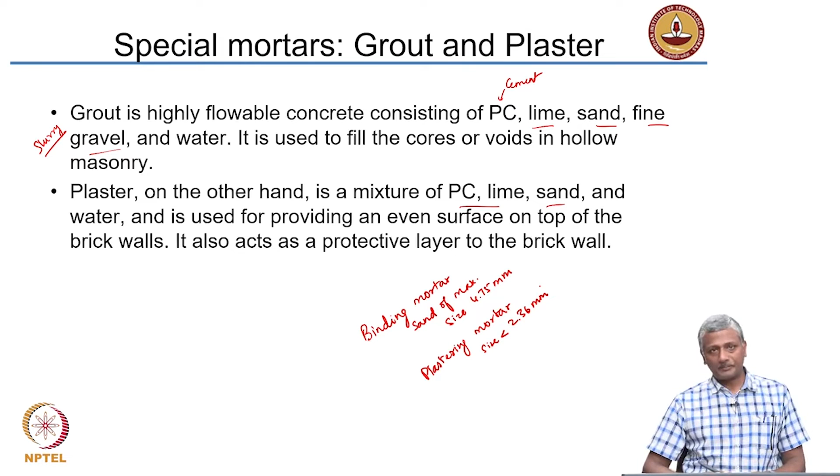Now, very often if you go to different parts of the country, you will see interesting practices being done with lime. With lime, oftentimes you will find the use of different types of additives. For example, if you go to North India, you will see that additives for lime could include something like urad dal. In the old practices and the heritage monuments, they used to grind this urad dal into a nice paste and mix it with lime. It basically improved the consistency of the mortar and made it easier to apply.

In South, you will often find that jaggery is being mixed in the mixture of lime and water. They mix jaggery with lime mortar and water, and jaggery imparts a nice water retentive quality to the structure. So, depending upon the application and depending upon the geographical location, there are practices that have thrived, that have stuck on from age old times, which are still being followed, especially with lime. So, depending upon the geography and location, you may get very different practices as far as lime mortar preparation is concerned.

There are even examples of people having used blood in lime mortars. It turned out that blood was a very good water retentive material, so that ensured that the lime mortars were consistent and behaved nicely. But of course, you do not want to use blood anymore. In the past, they also used animal hair. Animal hair works like fibers inside the material, right? The mortar is held together nicely by the fibers.

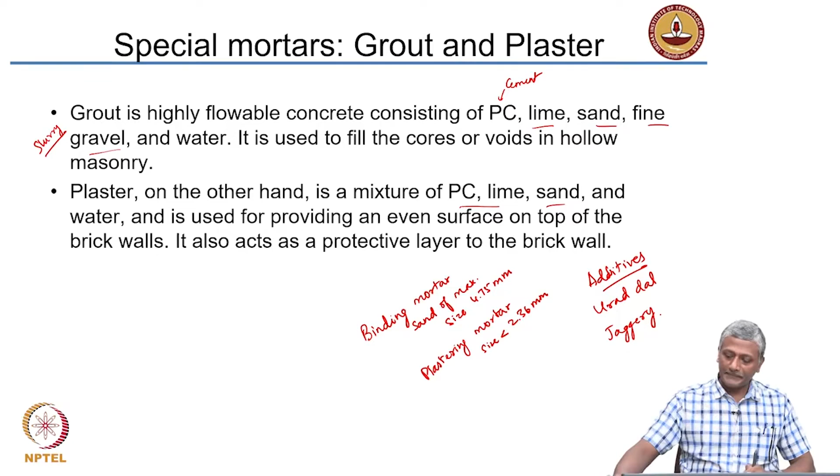Now, we have talked about masonry materials, but it is important for us to also understand how these materials are actually put together to make the masonry structure possible. And these masonry structures with stone, brick and mortar are engineered to resist loads primarily in the axial direction. A lot of them are not engineered to resist loads in the lateral direction. So, we will talk about that aspect separately towards the end of the chapter.

So, before we go into looking at specific aspects of masonry construction with bricks or with stone, let us try and understand some terms that are associated with masonry. One of the common terms that we use in masonry is that of a course. A course is nothing but a horizontal layer of masonry units which have a thickness equal to the thickness of each individual masonry unit. For example, if you are using a modular brick, the thickness will be 10 centimeters in a course.

If you are using a concrete block, the thickness in a course will be 20 centimeters. If you are using a traditional brick, which is 23 by 11 by 7, typically 23 by 11 is the top and bottom cross-sectional area, and the height is 7. So, if you are using a traditional brick, the height will be 7 centimeters.

Now, depending on how you are placing these bricks in your wall, they are called headers or stretchers. For example, if you are placing the bricks in the direction of the wall, that means the length of the brick is facing the direction of the wall, that is called a stretcher. So, it is stretching along the wall. A brick that is placed perpendicular to the direction of the wall, so if the wall is running like this, the brick is placed perpendicular to it, we call it a header. So, we have to use different arrangements to satisfy the certain requirements of the bonding.

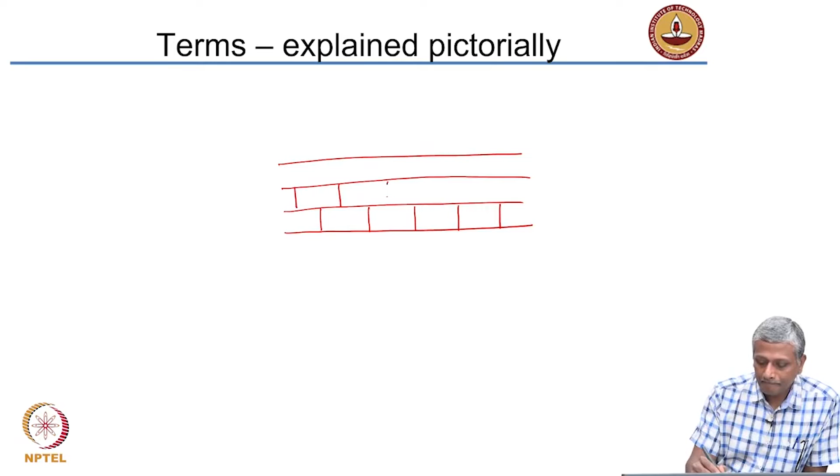Now, the joint is nothing but where the masonry blocks are coming together and where the mortar is available. So, we have bed joints, cross joints and vertical joints. Let me just demonstrate this in a simple drawing. I will just draw a typical brick wall. So, that is the bottom of my brick wall, and I have several layers of bricks, arranged like this for instance. So, let us say I have a running wall length which looks like this. I had several different definitions here. So, this is one course of bricks. One full layer of bricks is called a course.

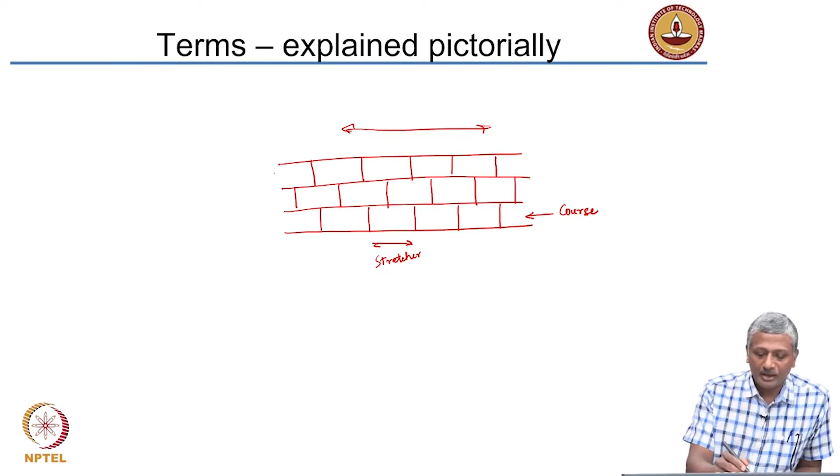We also saw header and stretcher. In this case, all the bricks are in their lengthwise direction, so they are all stretchers. The wall is running in this direction, and the length of the bricks is also in the same direction, that is called a stretcher. Now, if I come to the corner of the wall, where the wall ends, and I draw the plan of this wall, it looks like this. So, this is the end of the wall or quoin. If I am looking in plan, that is what it looks like.

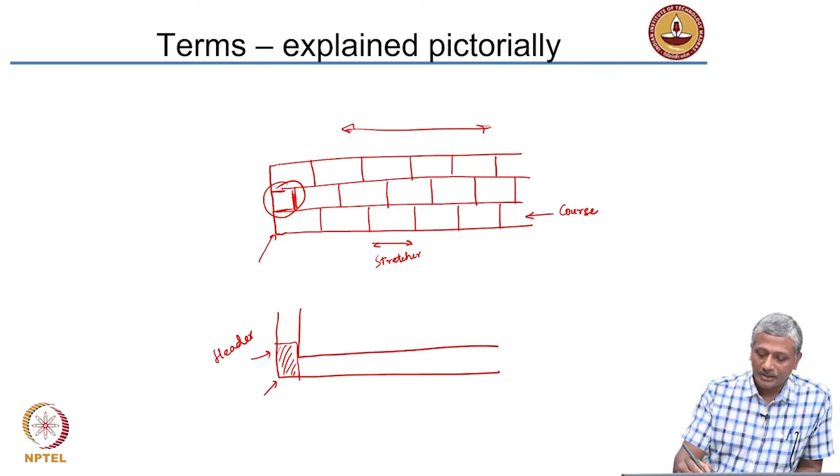So, if I draw the second course of bricks, this brick is actually in the other direction. So, that is called a header. When the brick is perpendicular to the main direction of the wall length, it is called a header. A bed is nothing but the lower surface of brick or stone in the course. So, in this course, that will be the bed, or in this course, this will be the bed.

Then we have the quoin. Again, as I said, the quoin is nothing but the exterior angle of the wall. So, that exterior angle is called the quoin. That's where we actually use the quoin closers or queen closers to close out the wall at the end so that it can run in the other direction. I'll come to that when we come to specific arrangements of the brick units.

Then we talked about the joints. The mortar that is in the bed is called the bed joint, obviously. The mortar that is in the vertical parts is called the vertical joint.

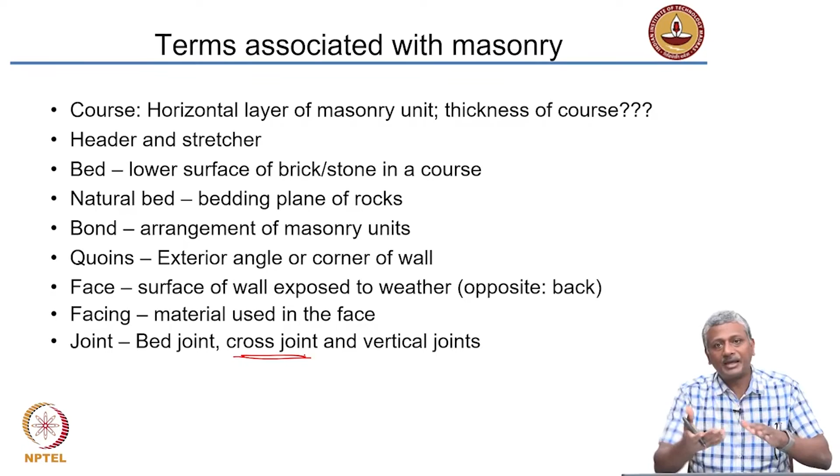And of course, if there are two layers of bricks like this in the wall, then apart from the vertical joints, you also have cross joints between the bricks. So, two bricks are stuck together like this; along the length they are stuck together, that's the vertical joint, and then under the bricks is the bed joint. So, those are the different terms which are explained pictorially here.

Now, there are other terms also we need to look at in masonry construction. Very often the terminology can be quite different as compared to regular concrete structures, so it is important that we understand this. In bricks, when we have a column, we typically call it a pier. A brick pier is a freestanding column. A brick pilaster is a pier that is attached to the wall and which projects beyond the wall. So, that is a pilaster and that is a pier.

Now, in a regular masonry construction, you have the main walls which are running like this, and you have the cross walls. Here the wall and piers are attached at different locations. There are also examples of the use of lintels or arches for door openings and window openings. There are several types of arches. We will talk about arches again separately later, but you can have different arrangements of window openings and door openings that are basically making your arches.

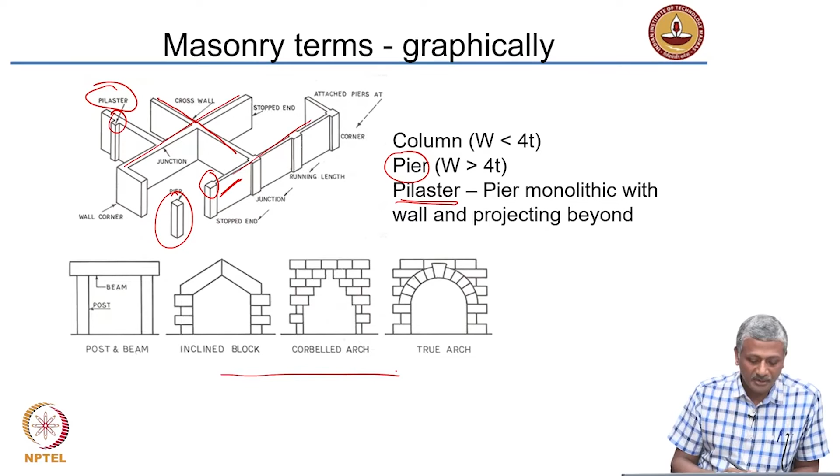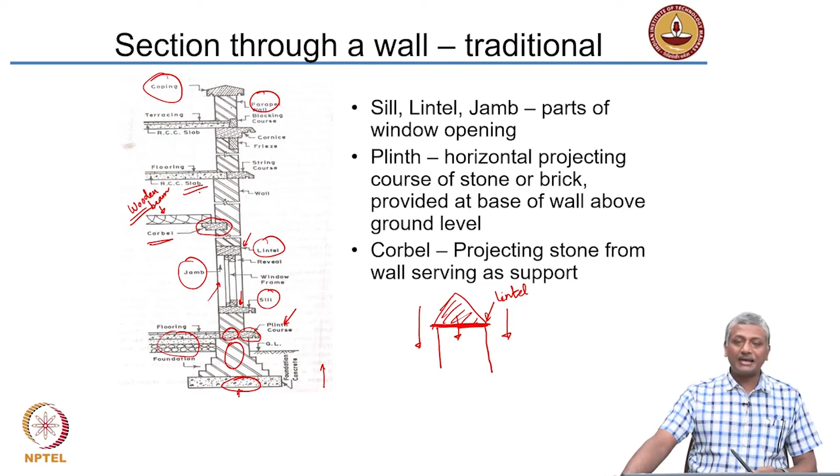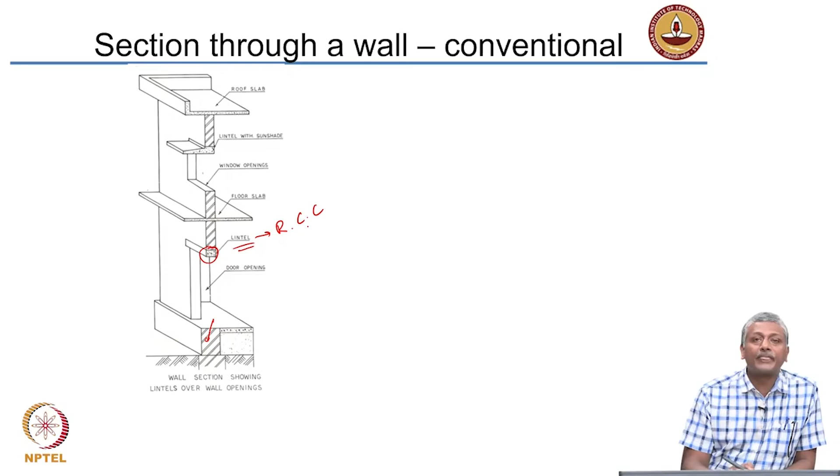In more recent construction, obviously you won't see such elaborate features. You'll probably see a very simple cross section of the wall. Nevertheless, it still combines different materials together. So in the foundation, obviously you have brick and concrete. Again, you have brick here. You have a door opening here. The top is a lintel, typically made with reinforced cement concrete, right? The floor slab is also made with reinforced cement concrete.

Okay. You have a lintel along with sunshade. You may have seen that these are projecting shades that come out of your window to ensure that the sun does not directly get in, right? So you are protecting your house against the direct entry of the sun. So it reduces the heat to a large extent. So that's called a lintel, and it has a sunshade attached to it, and that's also made typically with reinforced cement concrete.

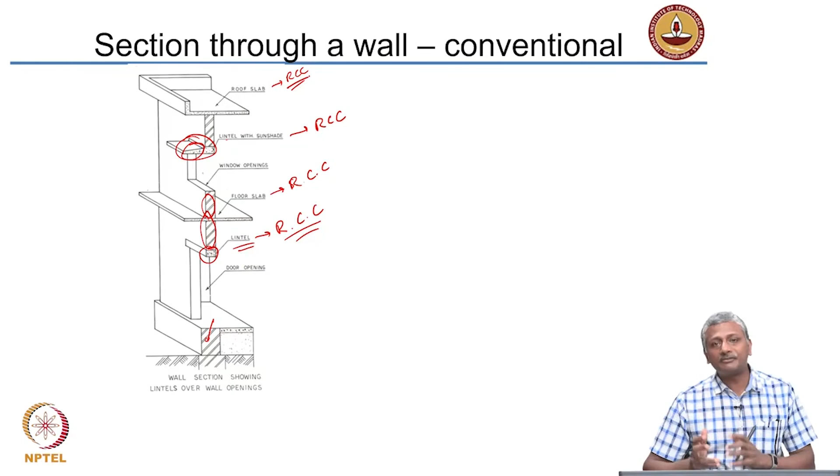So you have brick, you have the brick walls, okay, you have the reinforced cement concrete features like lintels and sunshades, and of course the roof slab is also made with reinforced cement concrete in most typical residential households. So this is a typical residential wall that you'll find. But in more modern buildings, we start utilizing the benefits of multiple materials together in a different way. And how do we do that? So in a modern building, we utilize the engineering concepts optimally. So what are these engineering concepts that we are trying to utilize?

So what does the reinforcement do? I told you that the walls are designed to take axial load. That means the loads that come in the plane of the wall. Now what if the loads are coming along this direction? The wall has to bend like this, right? And if it does not have reinforcement, it will simply collapse. So the wall lateral resistance is increased or enhanced by the presence of reinforcement so that it can respond to the lateral loads also nicely. So that's a nice structural wall, but on the outside it's got a brick veneer.

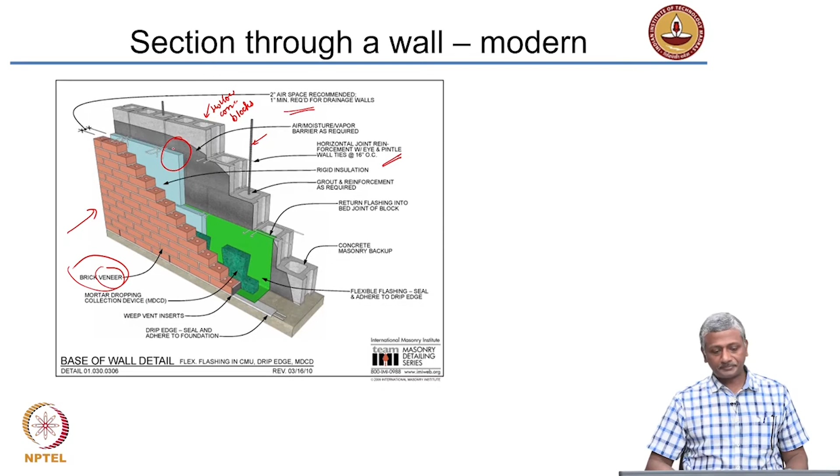But interestingly, if you look at what is inside, it's got an air space. So there's a cavity inside which reduces the transmission of heat and sound. You also have barrier layers for moisture and for heat and sound, like foam barriers for instance, okay. And then you have a waterproofing membrane. So overall you have a nice composite wall which is made up of many different materials which are functionally different, which are different in terms of their mechanical characteristics, okay. And this way you are able to maximize the potential of how that wall will work to protect the interior from the exterior environment, right. We'll come back to that a little bit later.

Again, coming back to the use of different types of materials for mortar, what type of mortars are typically designed for masonry and how should we actually use this? As I said, the materials typically are lime, Portland cement. Sometimes in some countries you may also have special cements called masonry cements. In India also masonry cement was available in the past. Today it's not available, okay. Today only plain cement is available which has to be mixed with sand. Masonry cement in the past was a special blend of cement which was much more suited for masonry purposes.

Now sometimes limes are used in combination with materials called pozzolans like fly ash or volcanic ash, and then in some instances you may find that lime and Portland cement also are mixed together. Okay. In certain cases, as I said, in rural areas they use clay or mud mortar, but those actually end up making low strength masonry.

The principle of designing the mortar for masonry is to avoid excess water. What will happen when you press the masonry blocks together with the mortar in between? If there is excess water, it starts coming out. So usually this is defined in terms of the water to cement plus lime ratio, which should be around 0.65. If you have much more water beyond that, this water will start coming out when you press the mortar joint together.

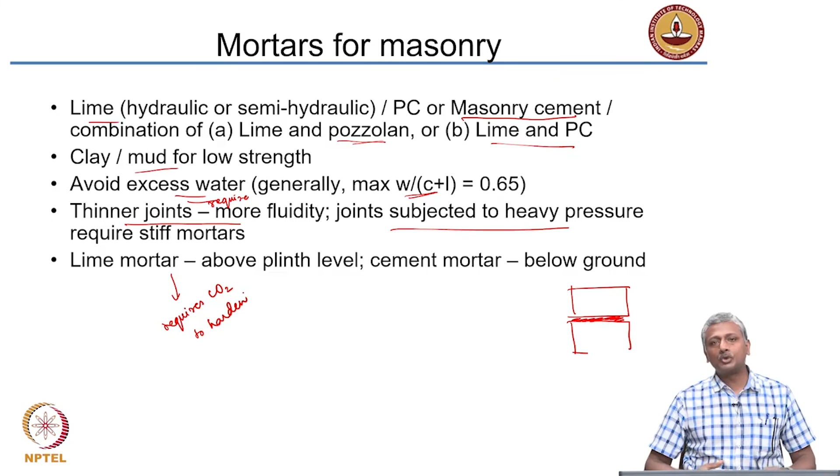Why is mortar needed? Of course, mortar is needed to bond the masonry units together because it keeps everything in place. It serves as a seating material for the units. Units sit on it and make a level surface for the courses. And the mortar is also nice to break the monotony of the masonry blocks and provide an aesthetic quality to the structure. Please remember, the mortar is designed to be the weakest part of the masonry wall. Now, why is this so?

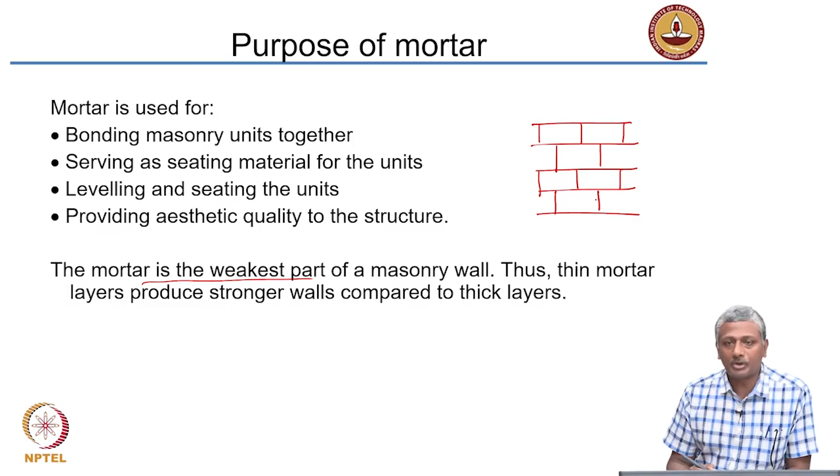Again, let me just draw a simple masonry wall and draw the joints like this. So, the masonry wall has been drawn with the mortar joints. If the arrangement is like this, when you are having a load on this wall, the wall will tend to fail, right? Now, if the mortar is weaker than the block, the failure will come like this. The crack will probably go along the mortar joints.

So, the building will fail because of failure of the mortar joints, and that will be a slow and steady failure because the crack has to travel a longer path. So, it needs to come like this and like this and go. On the other hand, if the mortar was strong and the masonry material was weak, the failure would be completely different. You may have a cracking right through like this.

So, the entire building may just split into half because the masonry material, that is the brick or the stone, is weaker than the mortar. You have used a mortar which is very strong and it does not fail at all. So, you will get what is called a brittle failure. In a brittle failure, your structural collapse will be sudden. And in engineering buildings, you always want to ensure that you have a slow and steady failure.

So, that is what you get when the mortar is weaker, you get a slow failure. It may not be a ductile failure, but you will get a slow failure. Not like metals; ductility in metals is a completely different order. Here we are talking about slow failure, which gives signs of damage so that people can be evacuated from the building. But a brittle failure will be a sudden failure. So, you do not want to create mortars that are stronger. You want to have mortar designed weaker than the masonry unit.